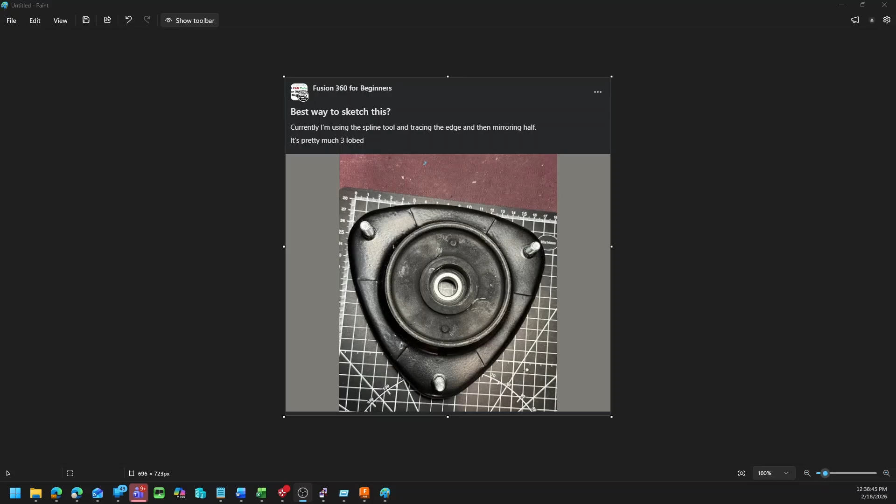So today we're looking at a question of how to draw this. I believe this is the mount for a strut, and we're going to model that in Fusion 360. I'm going to talk about a few ways to model it and show a Fusion bug as well. So let's jump in and take a look.

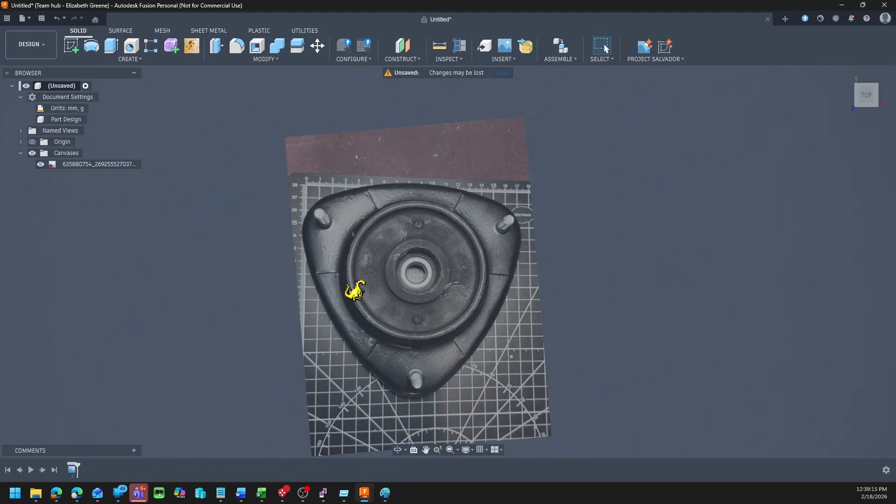So here we are. I'm in Fusion now, and I've imported the image as a canvas. It's not the best image because there's some error there from the camera being off-center and some perspective distortion, but it should be pretty close. So let's go in and create a sketch.

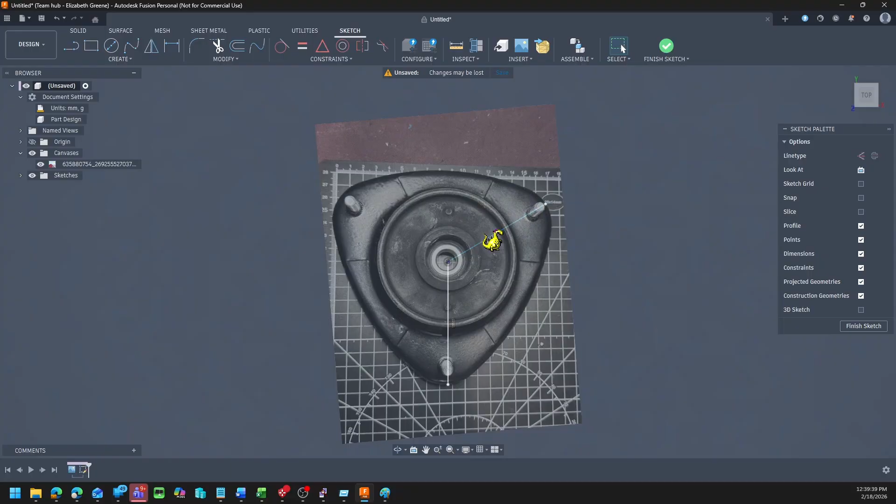So the way that I would normally design this is come in here and make a line down like this, make a line over here, and there's 360 degrees in a circle. This has 3 points, so it should be 360 divided by 3 is 120 degrees between these points. Okay? Now, these are symmetrical, so they should be of equal length, and I can make these into construction lines.

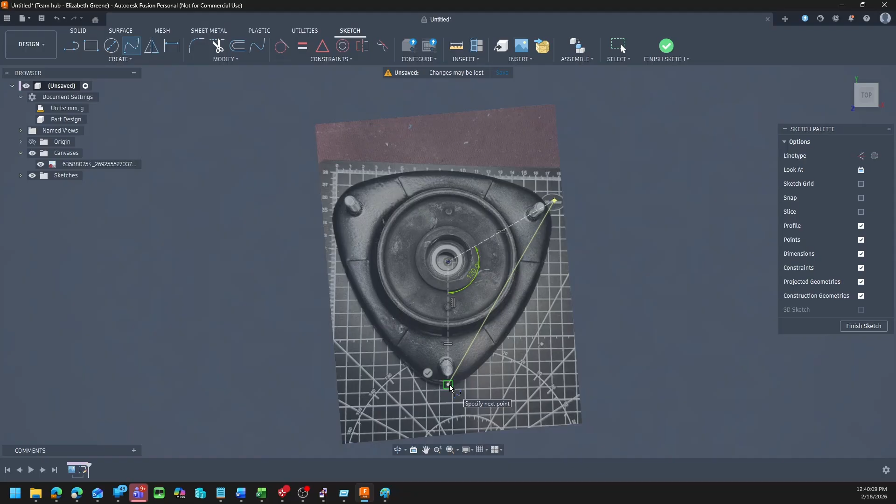And then I'll come up here and use the spline tool. This is the fit point spline tool, and connect these two with a line like this, and then a little green check mark to make it okay. And then if I make these handles here perpendicular with these lines back to the midpoint, then that will give me the shape that I want.

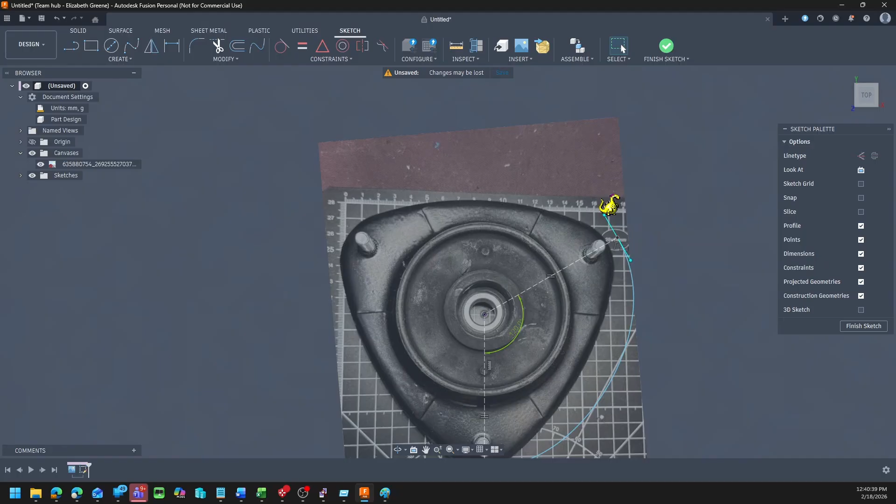And I can make these handles have an equal constraint. And now with that done, I can adjust the handles to get a pretty close approximation to the shape. Looks like I'm off a little bit here. Again, perspective distortion. I'm not going to be able to make this perfect, but let's see how close we can get this.

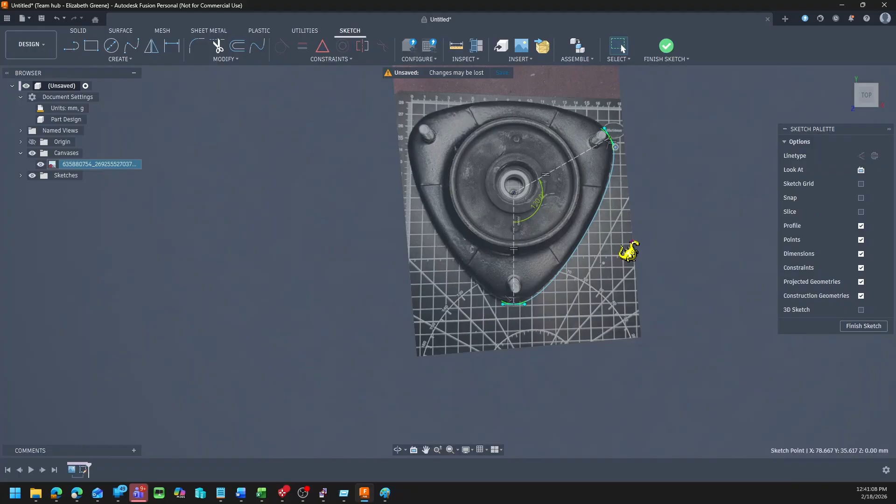Bring this in just a smidgen. Okay. Maybe a little more curve. Okay. So that is a good way to approximate this curve visually. Then I will come in to create a circular pattern and grab this, rotate it around the center point, and if I hide the canvas, that will give me my shape. If you're making guitar picks, there you go, there's your guitar pick.

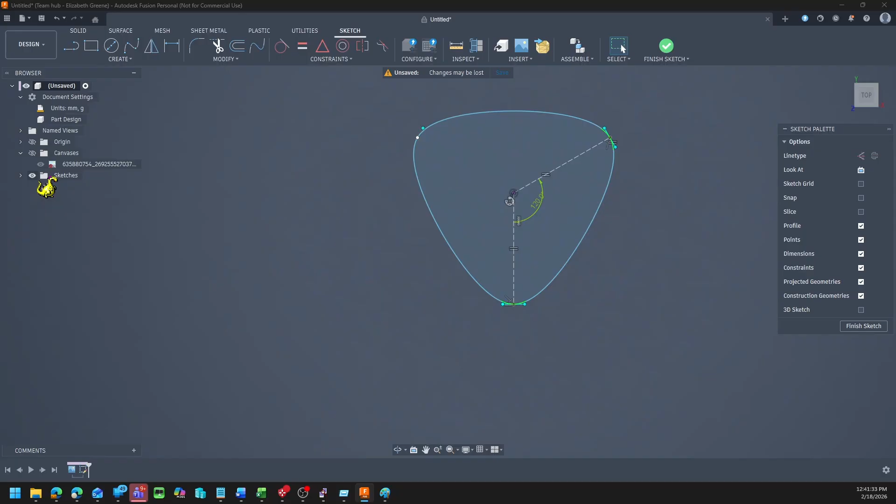But here's a problem. Here's why you shouldn't do that. So I'm gonna turn the canvas back on here. Let's say I want to tweak this. So it looks like this is in a little bit too far. Let me grab this point here and try moving it out. And now my curvature is gone. This is a bug in Fusion, and I've reported it as a bug.

The workaround for this is instead of doing a fit point spline, you could make a control point spline to do this, or you could model just this corner here, extrude that, and then circular pattern it after you had extruded it. There's a better way to do this.

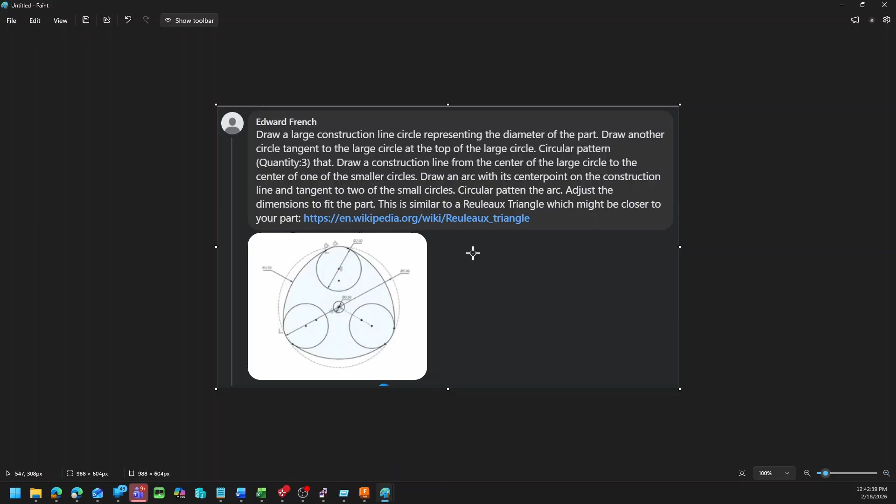So one of the people replied on the thread suggesting to construct this in a different way with a set of circles and arcs, and I'm going to show how to do that. Normally I redact the names on this, but Edward's solution here is much too useful for me to just make it anonymous. So well done to him. So I'll show the other way to model this. So jump back into the sketch here. I'll probably butcher this pronunciation, but I believe it's a Reuleaux triangle.

So I'm going to Control Z here a few times and go back to just my sketch and canvas. And let's get rid of these lines. Get rid of all of this. Delete. Delete. There we go. Bring back the canvas, please.

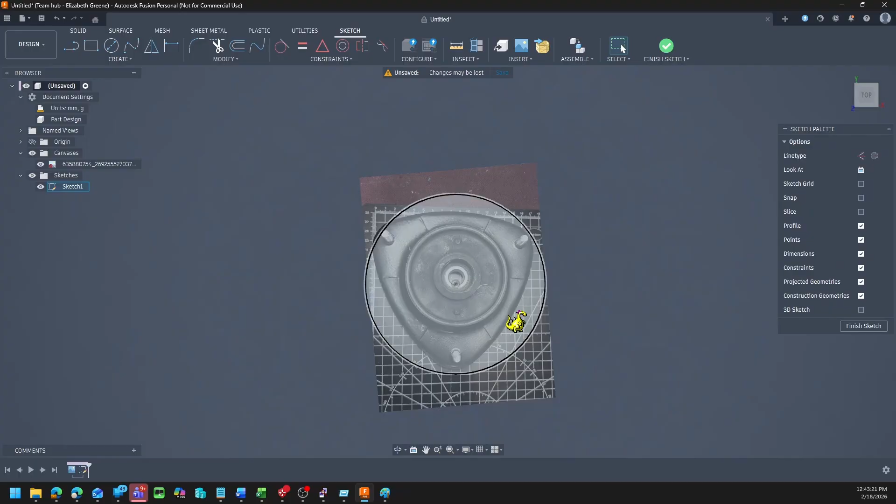All right. And so the method that he suggested is we'll make a circle that defines the rough size of what we're trying to make. And here I can tweak that canvas one more time to make it fit. That looks like a pretty good match for it. Now, we make this circle into a construction line. I'm going to hide the canvas here.

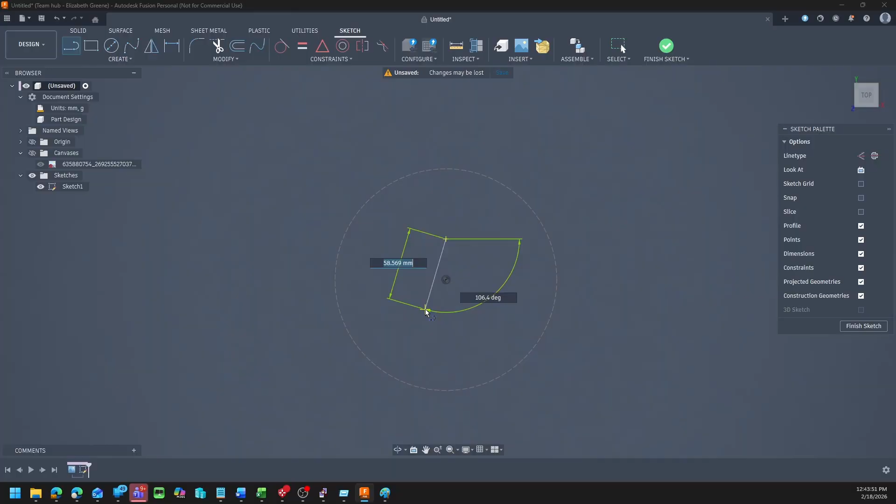And now we need to draw a line here. I'm going to make it where it crosses the center point, so we'll make it coincident with the center point, and this needs to be, in this case, a vertical line. And we're going to draw two arcs here.

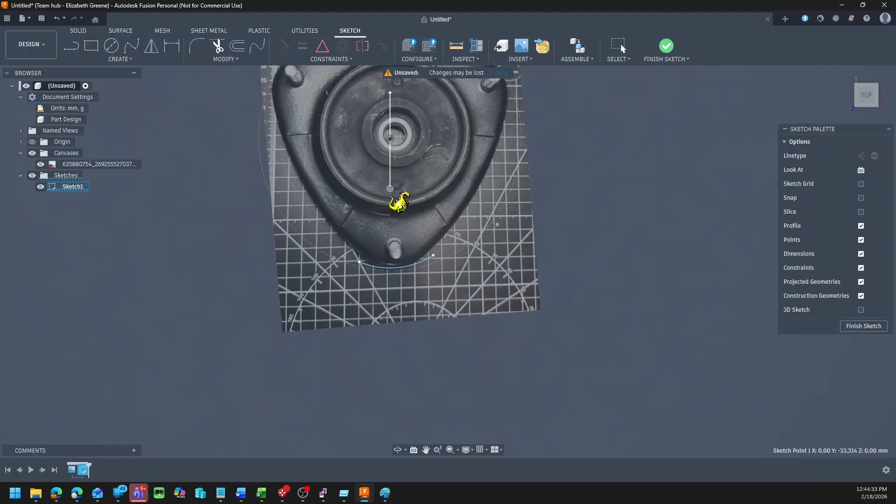The first arc that we're going to draw, we'll create arc, center point arc, is this curve right down here. So I'm going to grab this point, come down here, and sketch to this other side over here. Now, I don't have that right. Looks like it needs to be a little closer in, and I can wiggle this around. I'm not going to wiggle that around any more than that for now. In a moment, I'll show you how this is a place where we have to trust the process.

The other thing I'm going to do is create another arc, center point arc, somewhere on this line that's not constrained. So we'll go with right here. I'm going to sketch from roughly right here to right here. Now, I know that that is wrong. Again, we're going to trust the process.

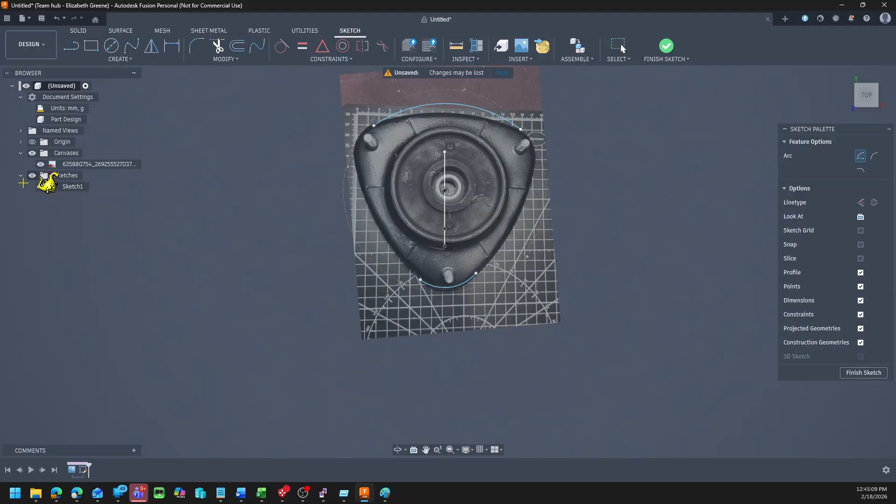I'm going to hide my canvas again, and I'm going to grab this little arc down here. This is the shorter of the two. I'm going to make it tangent with my construction circle. Okay. Now I need to create a circular pattern for these two arcs here. Now, this looks a little bit like an umbrella to me, so I'm going to call this the umbrella pattern.

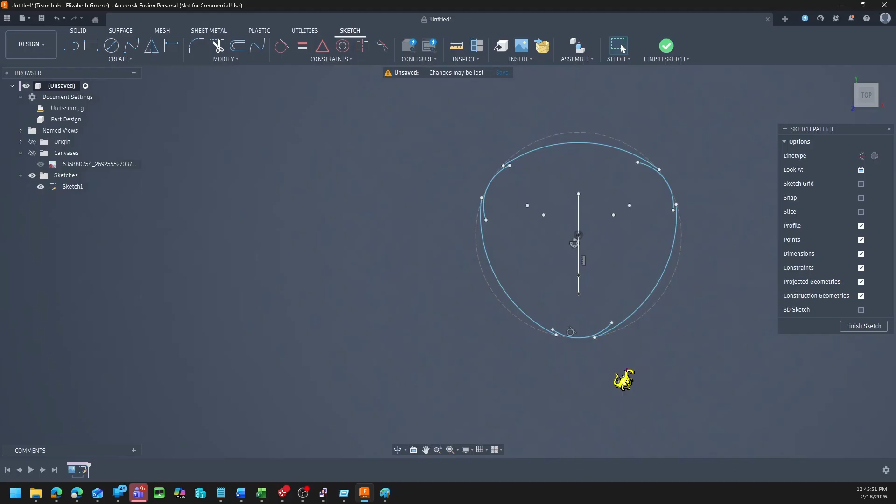I'm going to circular pattern these, and this is a triangle, so quantity is 3 for 3 different sides. Trust the process. We're almost there. Now I want to create a coincident constraint between this arc and this arc, and the same thing, another coincident constraint here and here. And then the last step is to go back and make those tangent to each other, and that's it. It's done.

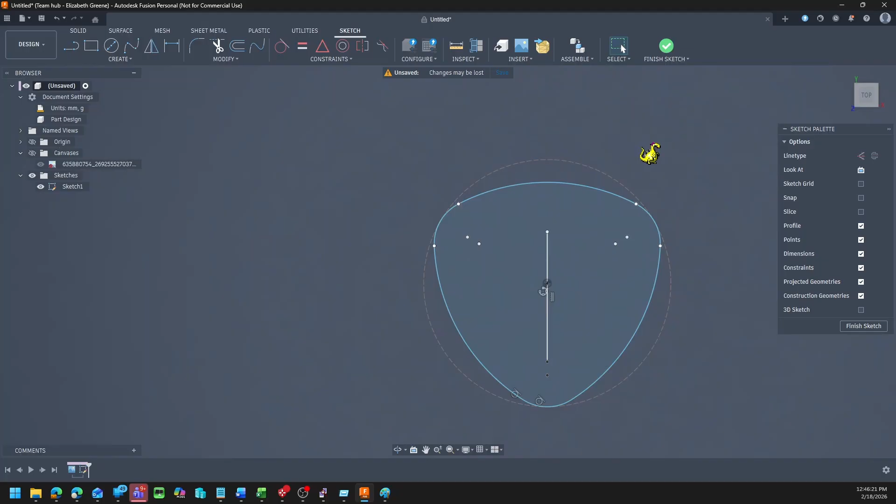So now I've drawn that same shape, and I have the ability to resize and change this curvature. Why is this better than the other method, assuming they fix the Fusion bug, or why is this a good way to do it? So when you have the physical part in your hand, you can get a tool like this. This is a fillet gauge.

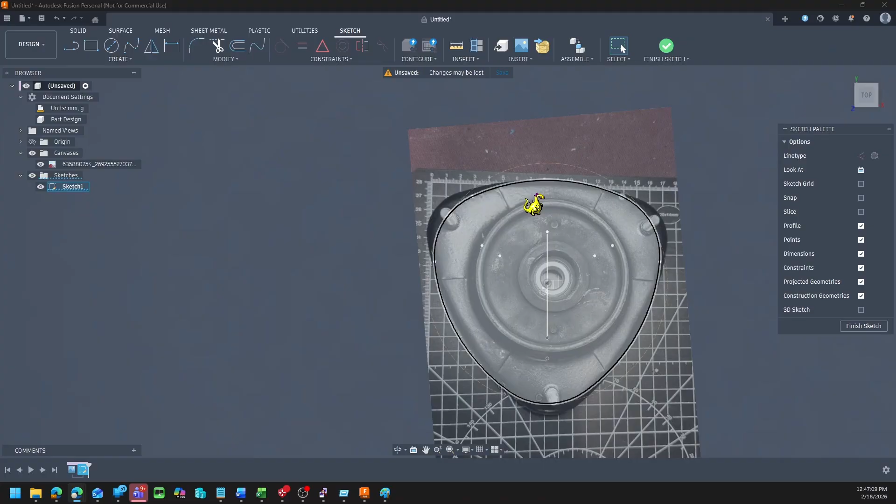I'm not recommending Temu here. I have this specific tool that's from them, but you can also get 3D printable versions from Thingiverse or Printables to measure those. Or you can use a radius gauge that fits on a set of calipers to measure these distances, and then you can specifically set with a dimension tool the dimension of this great circle here, and the dimension of these corner arcs, and set these to get specific shapes based off of the measurement of your part. And that is way easier when you have the part in your hand than just eyeballing it.

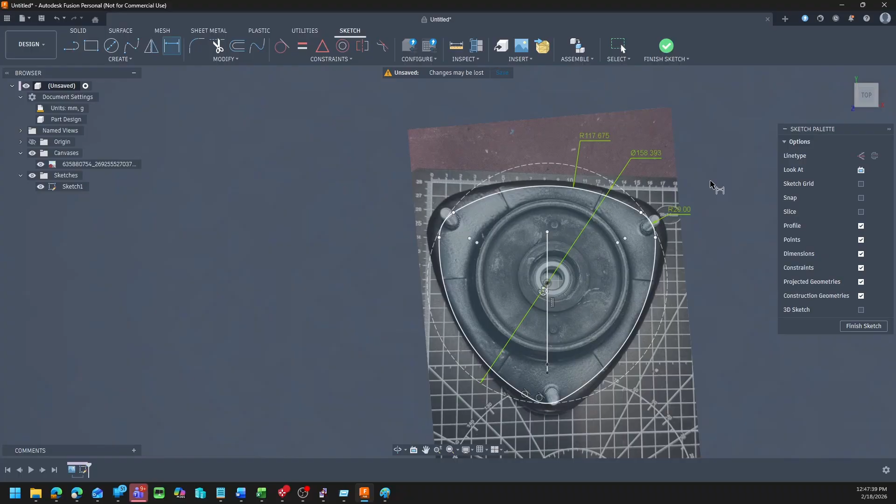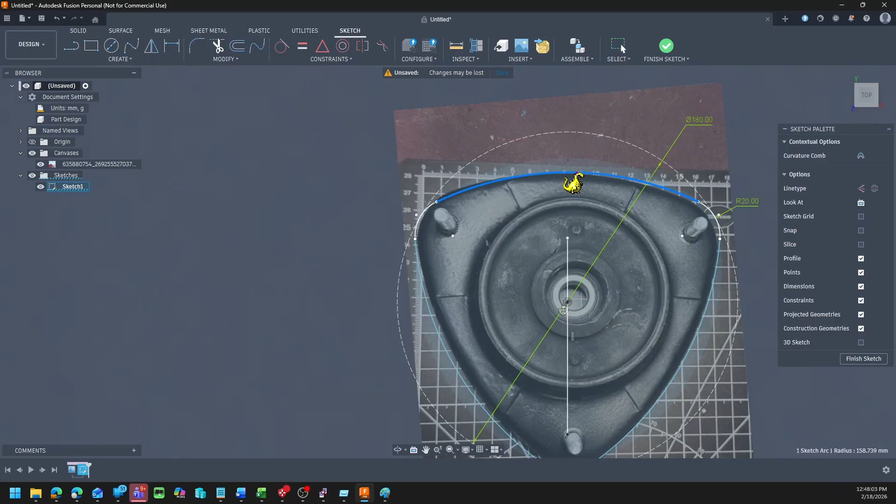So let's see if we can get close here. So with this great circle here, I think 190. 190 is too big. 180. Then radius of 20, and then make this one smaller. If I delete this, I can just drag it. And I can much more closely match the part based off of actual measurements instead of just eyeballing it. So a fantastic trick, and I really appreciate him sharing this.

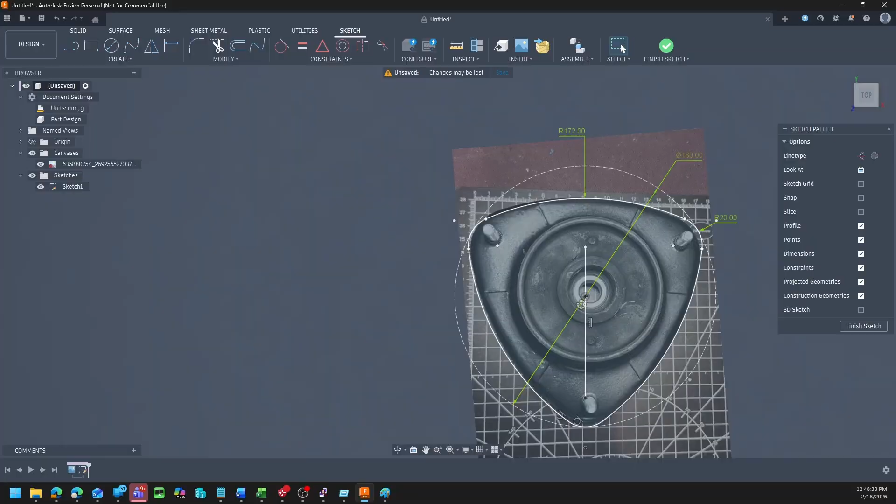And this will fully constrain the geometry. Let's see which one is not. This one that I need to fully constrain here. The 132. And now if I hide the canvas behind this, this is fully constrained. This line here in the middle is a construction line. And that's a much better way, in my opinion, to model that than designing it the other way. So pretty fantastic trick there, and great for modeling. Hope that helps.